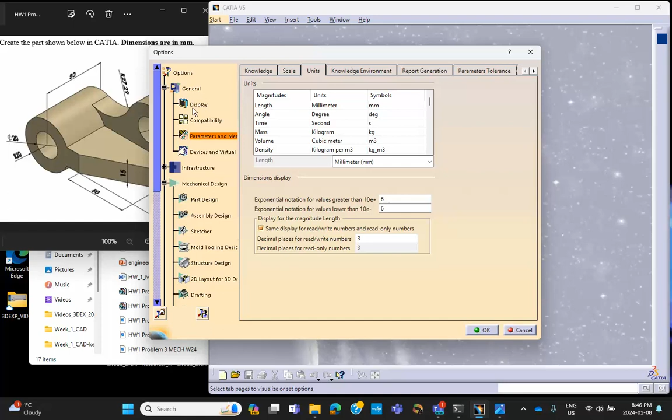Okay. And also, because of the sizes that are involved, I'll make the spacing of the grid maybe 20. How about that? So let's go to the mechanical design sketcher and make these things maybe, yeah, how about 25 millimeters with 10 millimeter spacing for each graduation. Okay, so let's start with the part file.

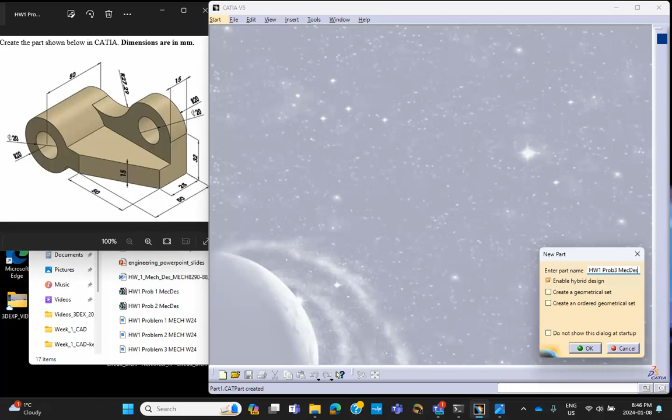Okay, and I'm going to call this thing homework 1, problem 3, and it's a mech design, the mech design course. We say fine. Immediately save it: File, Save Management, Save As. There's a folder here. This is the one that I'm going to use. Yep. So this is fine. And now we're going to make it.

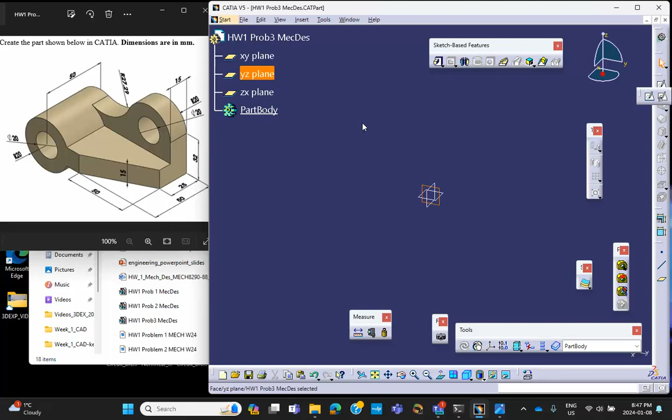My strategy is to make this circular region with an attachment and then pad it first. So on that vertical plane, I will sketch. I'll sketch. So for example, I can do it like this. Okay, and another circle here.

Okay, and let's dimension these things. The big circle is radius 20, and the inside one is radius 10. So let's do the inside one first. So this is diameter 20. Okay, and the other guy is diameter 40 or radius 20. 40.

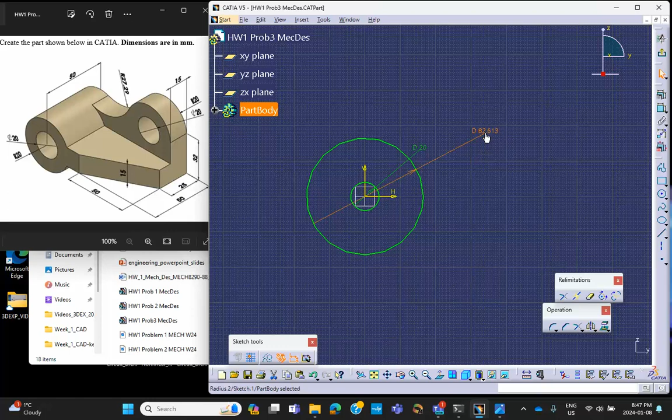Okay, good. Now the handle, I'm going to draw a centered rectangle like so, and we're going to dimension it appropriately. So let's see now. The dimension, the height is 15. So let's do that first. This is the height. Make it 15. Okay, that's the height.

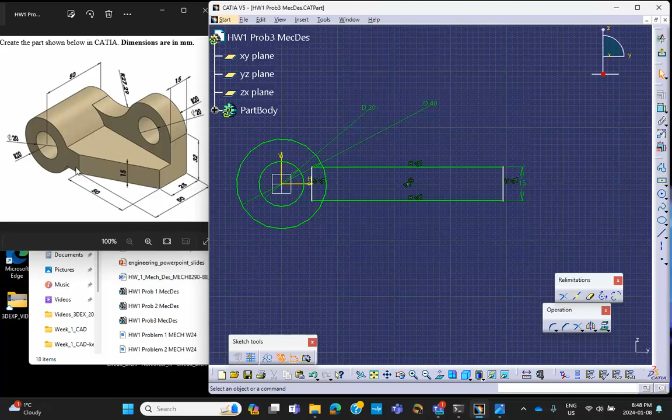And let's see, what else do we have here? The distance from this point, the center of the circle, all the way to the end is, well, that's kind of hard to say here, but these dimensions must... Let me do the following then. It's kind of hard to say from this drawing. So let me see. I want to know how much is it from here all the way to that center.

Well, let's see now. This, I hope that dimension is not missing. Well, I'm sure that there is a dimension missing. So let me assume that the distance from this point to that circle is, well, we have it here roughly 50 plus 10, 60.

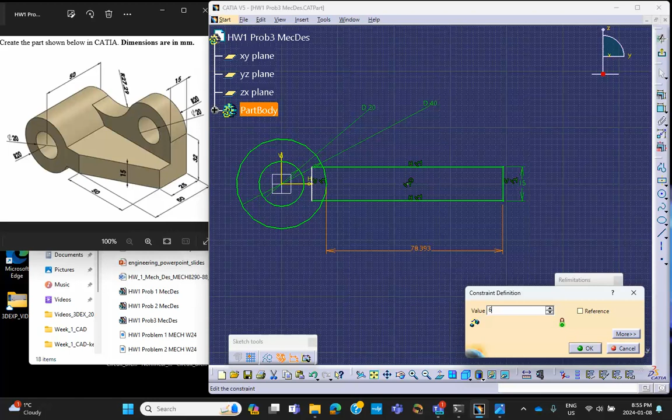So let me see if I can do that from here to that circle, the horizontal distance. Let me assume that this is 60-ish. That dimension is missing. 60. You say okay. Actually, let's make this thing 70. All right. Hopefully, that'll take care of it.

Now, I want to pad this thing, but you cannot pad a self-intersecting curve, so you have to do a quick trim to get rid of all the extra lines. Here's the quick trim, Relimitation, Quick Trim. So I want to get rid of this. I want to get rid of that and that and this.

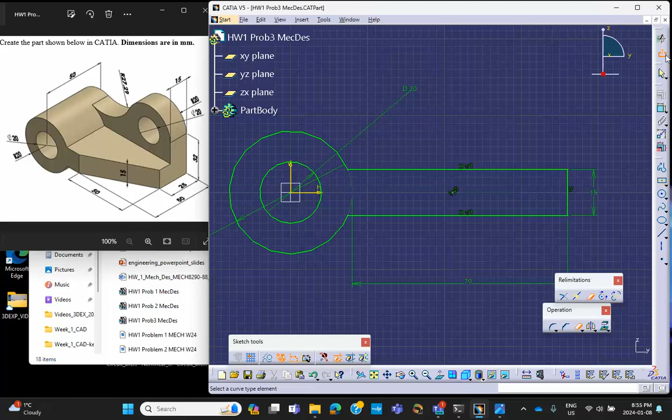Okay. Now exit and pad it by, for example, 50. It looks like it's 50. 50. Okay. All right. Okay, so now why don't I make the cutout on that face? So on that face, I will sketch.

One way of doing it is, for example, drawing something like that with the right dimensions, and then make a pocket. The other one is to draw a plane and split it. So let me do it like this.

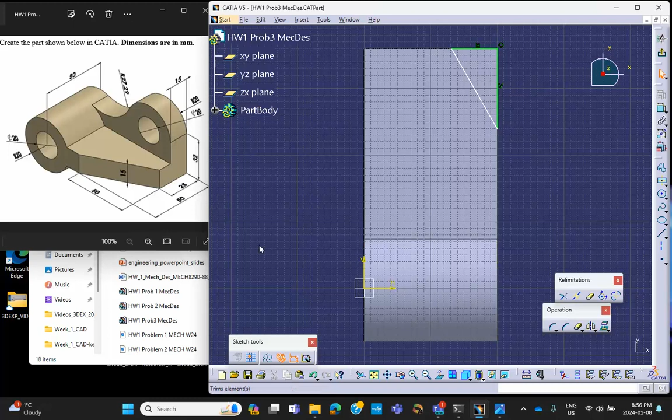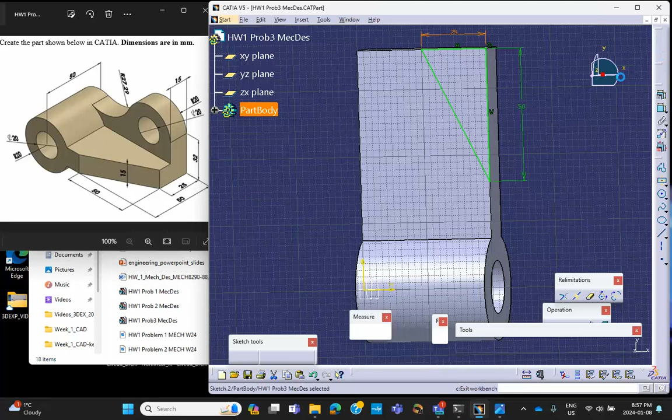That point, control this point. We make it coincident. And we give it the dimension that we want. Looks like that dimension is 50. And that other dimension is 25. We say okay, exit, and pocket.

Okay, fine. Now the rest of the stuff. So we go on that back face. I will sketch. What do I sketch? Let me see. So normal view, I'll go a profile like this. You go from here. We will clean it up in a minute. So for example, this.

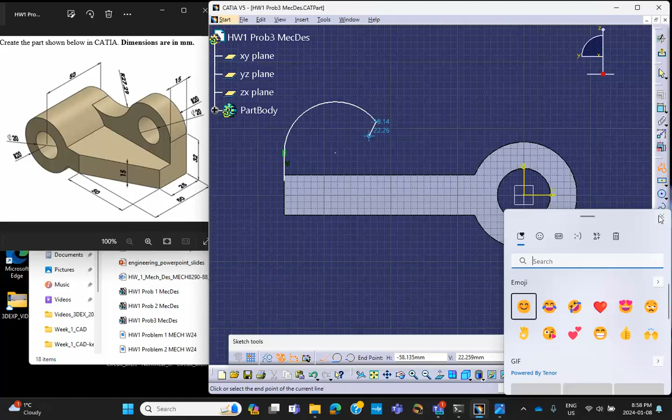Up a circle to some location. Let's not worry about it right now. I'll keep it like that. Escape. Okay, so let's first of all bring this thing and put it up there.

So this point, control that line, you make it coincident so it pushes it up. Good. All right, now let's put some dimensions here. So for example, it looks like this dimension is 15 plus 17. So looks like this is 17.

All right, and the radius of that circle seems to be 20. Okay.

All right, let me draw a circle here. Another circle there, right at the center of this. And that radius is, that diameter seems to be 10. Okay.

Now what I want to do is create an arc which is tangent to that and tangent to this. Okay, so let's see how we're going to do this. That's going to be, for example, we can do it as a 3 point arc. So for example, this point, that point, and I'll draw it like this, but we're going to clean it up.

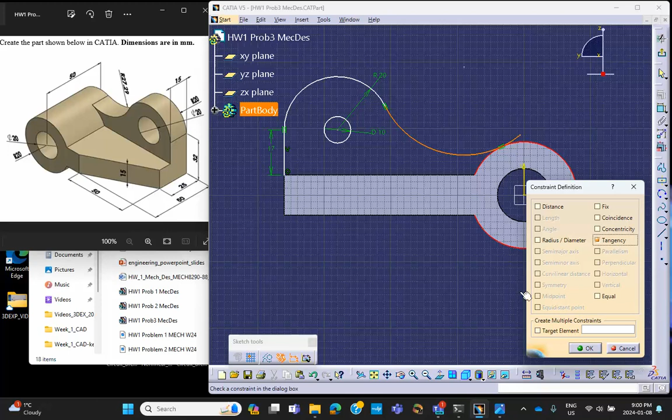Now the radius of this is 27.29. Is that right? So let's do this. 27.29. Okay.

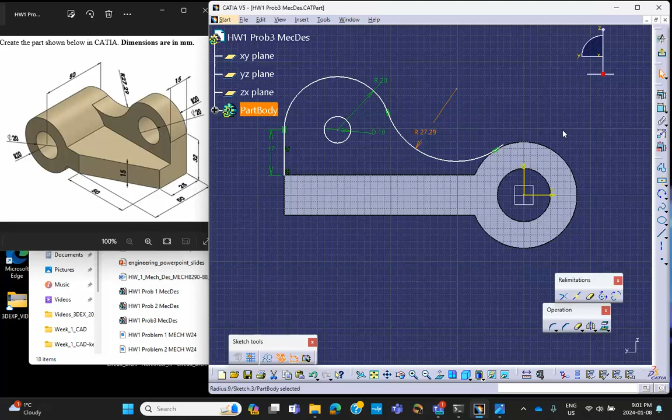And we have to clean this up, right? We have to clean this up. So let me do the following. Quick trim. Can I get to this piece? Nope. Okay, so I don't want that. Hang in there, I don't want to do this.

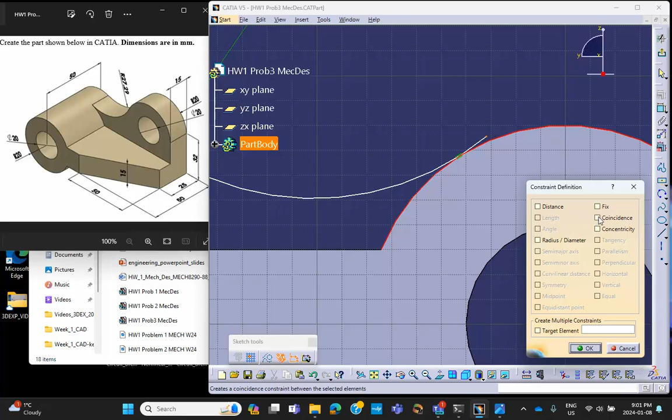What I can do, I can make this point coincident with that. So let's try it. So we say this point on that arc, control that, can we make it coincident? Yeah, very good. And then the rest is just close this thing off. So what do I mean by close it off? Means you go from here to there and to there. Okay, exit. So this is what I've got.

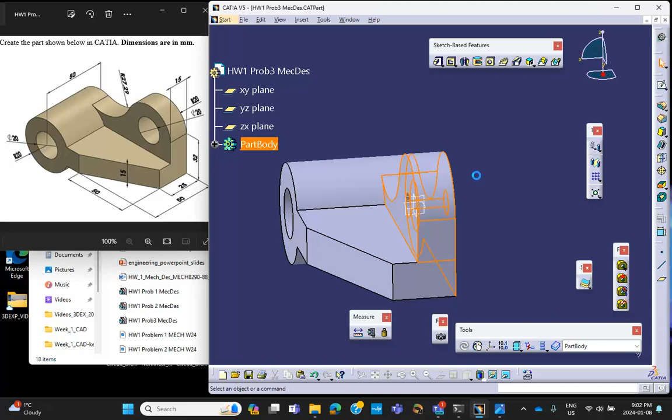And you make a pad of the given length in the other direction of thickness 15. There. The only thing is that radius doesn't seem to be right.

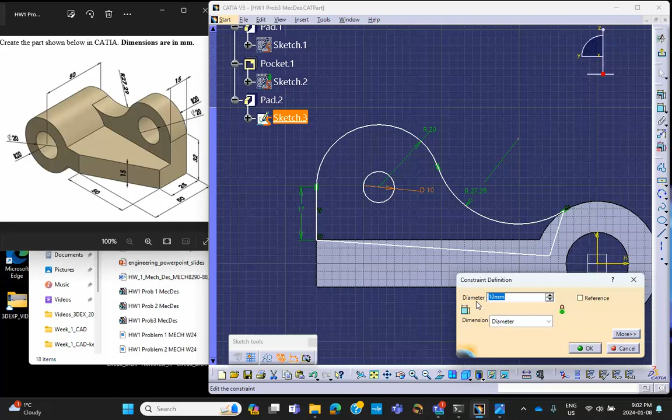I think the radius of that circle is a little bit bigger, so that should be radius 10. I don't know what I have here. Let's go check it out. So this sketch - oh, this is radius 10, not diameter. So diameter 20. Exit.

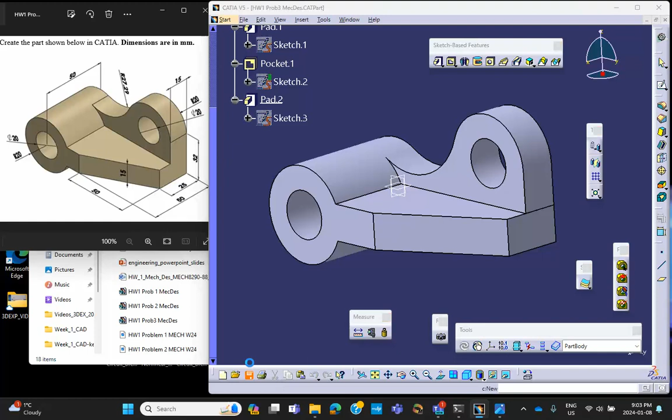And there we are. So believe me, that dimension was missing, there is a dimension missing here. So I made an assumption, and based on that, there is my part. Okay. Yep. Save it, and we can stop this.